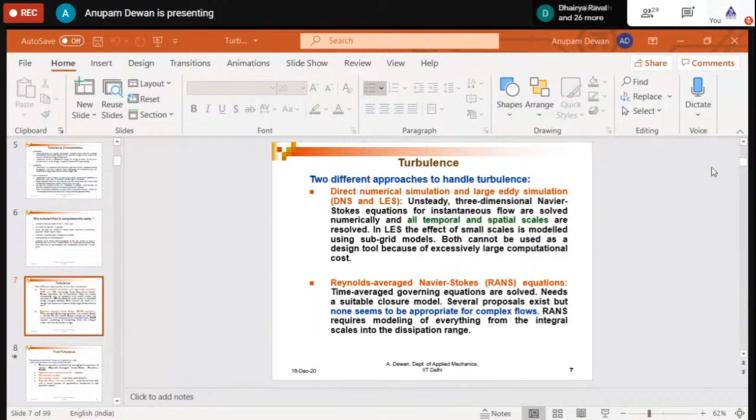So can you see the presentation? Yes, sir. Okay.

Turbulence modeling and overview of turbulence. So the title of my lecture as given in the pamphlet is Turbulence Modeling and Overview of Turbulence Models. The title is slightly different here, but nevertheless the contents are the same.

So can I ask one or two participants to tell me what do they know about turbulence? What is turbulence? So are the participants allowed to speak now? Yes, sir, they are allowed to. So I basically prefer to have a dialogue. I want to interact and then teach, or teach and interact, both ways. So can anyone tell me what do we know about turbulence?

So any answer? Irregular motion of the air. Fine, that's one small right answer, but a very small component. Anything else?

Okay, so I will start now. First, for 8 to 10 minutes I will talk about the physics of turbulence so that we can understand it. Once we appreciate how complex it is, I will talk about how to tackle turbulence. That was the title of my book, and currently I continue to work in this area.

So, definition of turbulence. I hope you can see the slide. Please tell me if you are not able to see it. You can see the slide.

A fluid motion in which velocity, pressure and other flow quantities fluctuate in time and space. So it's not just the velocity, but all flow quantities fluctuate in time and space. When we say that they fluctuate in time and space, it will become amply clear.

For example, you see this figure, can you see it clearly? Yes, sir. So initially, for once or twice, I will ask, and then if everything is clear, or if something is not clear, please point it out to me quickly.

So if you see here, what we see on the y-axis is u, that means the velocity in the x direction. Suppose you are sitting in a room and you have a coordinate system, and at a particular fixed point in the room, you want to see how the u velocity varies with time. So what you will do is use an instrument to measure it, and you will get a signal like what you see here.

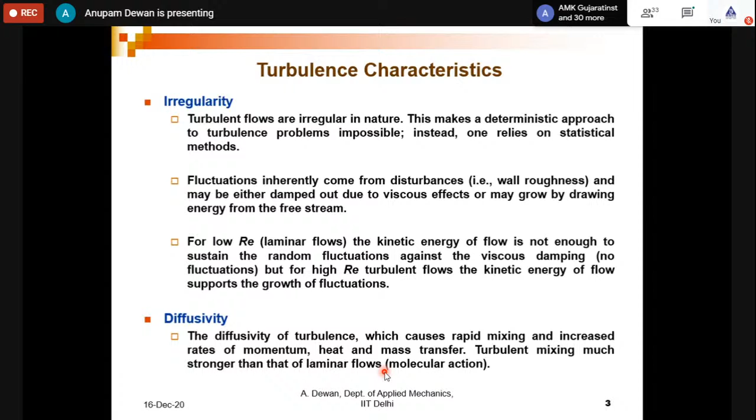So one key characteristic is irregularity, another is diffusivity. Another turbulent characteristic is that it occurs at a large value of the governing parameter. As mechanical engineers, most of us are familiar with the Reynolds number, which is the ratio of inertia forces to viscous forces.

But suppose it is some other flow, like a buoyancy driven flow - for example, smoke coming out of a chimney or from an incense stick, agarbatti smoke. Then in that case, the governing parameter is not the Reynolds number, but the Grashof number. So turbulent flow always occurs at high values of the governing parameter - Re in most cases, but not in all cases.

And how does it happen? Turbulence originates as an instability of laminar flows if Re becomes too large, or if the governing parameter becomes too large. These instabilities are related to the very complex interaction of viscous terms and nonlinear terms in the momentum equation.

Okay, just one question before I go to the next point. Can someone tell me what is vorticity?

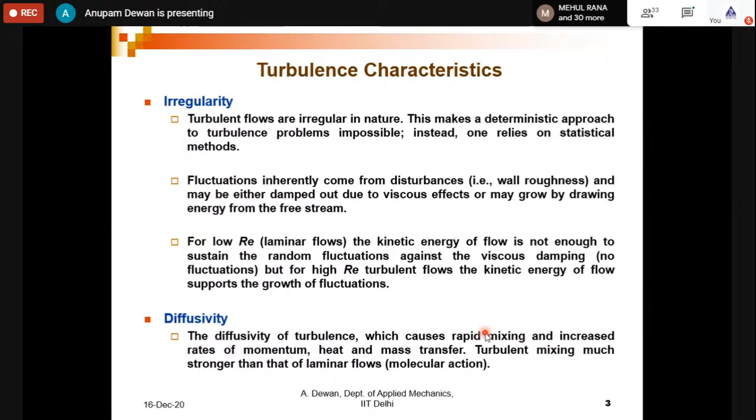Turbulent flow has irregularities and large diffusivity, which is very relevant. It occurs at large values of the governing parameter, and turbulent flows have 3D vorticity fluctuations.

So what is dissipation? Dissipation is loss of energy. Turbulent flows are always dissipative, meaning they lose energy. If there is a loss of energy, we need to compensate for it, otherwise turbulent flows cannot be sustained. So turbulence needs a continuous supply of energy to make up for these viscous losses. If no energy is supplied, turbulence decays rapidly. But we have seen that once a flow goes into a turbulent state, it does not decay because it takes energy from the mean flow.

Turbulence is also a continuum phenomena. Though there is a wide range of eddies at smaller scales, the smallest eddies are still much larger than molecular dimensions, and therefore it's a continuum phenomena, governed by the equations of fluid mechanics, as the smallest scales occurring in a turbulent flow are ordinarily far larger than any molecular length scale.

The last point is very important: turbulence is not a feature of fluids but of flows. For example, suppose we take one particular fluid, air, but in different situations, such as air in a wind turbine, air past an aircraft wing, or air in atmospheric boundary layers. It is the same fluid, air, but in different flow situations, the characteristics of turbulent flow will be different, because turbulence is not a feature of a particular fluid but of flows.

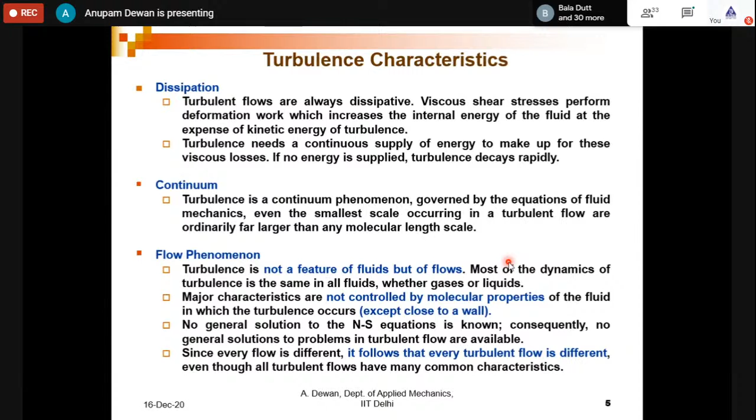In this course on applied computational fluid dynamics, when we do CFD, modeling of turbulent flows is a very important task. If we recall these characteristics, modeling turbulent flows is a very challenging task because the turbulent flow physics is very complex, as we have just seen.

So why is turbulent flow computationally costly? Don't go by the exact numbers, just get the impression. Suppose you take a flow on a plate of size 1.2 meters by 2.4 meters. We've seen that turbulent flow is always three-dimensional, so even on this flat plate, the flow will actually be three-dimensional. If you take the smallest eddy size as 0.04 mm, then in this domain you would need 5 trillion mesh points to resolve turbulence.

This was, of course, from 1970 - quite old. Now we have much faster computers, 50 years later. At that time, they said it would require 320,000 years with the computers available in 1970 to solve this for the given Reynolds number.

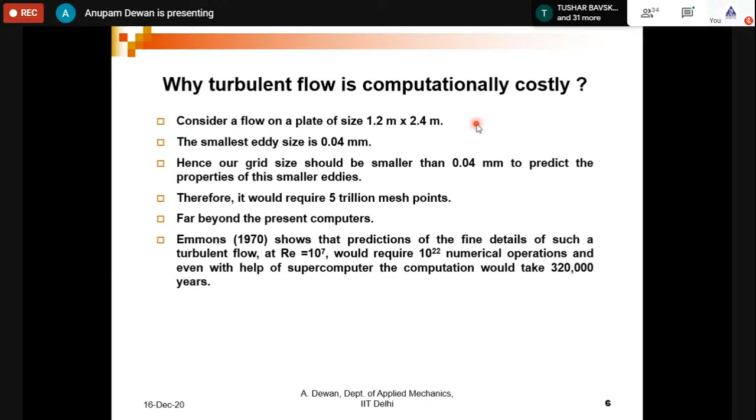Nowadays, if you want to perform such kind of computation, I think in IIT Delhi we have one of the very good high performance computing facilities. And if we want to do such a study in India on some supercomputer, such computation for this Reynolds number will take about 6 months to 1 year for a turbulent flow. So it's very important to understand turbulent flow and see if we can get the characteristics of turbulent flows without having to spend 1 year on a supercomputer. This is what we are going to try to touch upon in this lecture.

In the first category, unsteady three-dimensional Navier-Stokes equations for the instantaneous flow are solved numerically, and all scales in time and space are resolved, both temporal and spatial scales.

This is DNS. LES is slightly less computationally expensive compared to DNS, but in the same category. In LES, the effect of small scales is modeled using subgrid models. So in LES also we solve unsteady three-dimensional equations, but we do not go up to the smaller scales; rather, we model their effects. We write some equations to model the effect of the small scales. But both are actually quite computationally expensive.

So both DNS and LES are computationally very expensive. We are not working on DNS, but we are working on LES. And both DNS and LES, because they are very computationally expensive, cannot be used as a design tool due to the large computational cost.

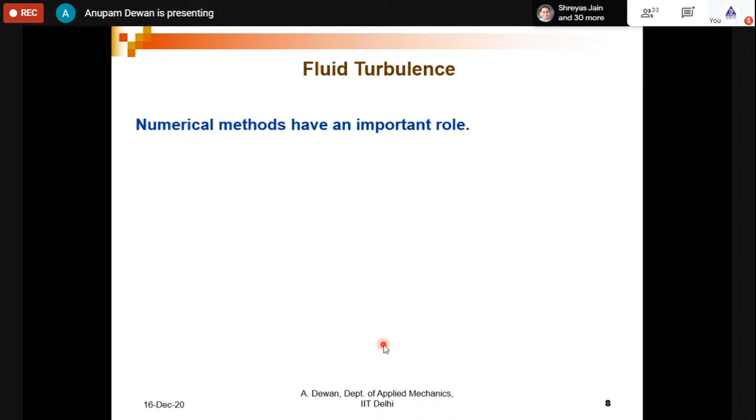So numerical methods have an important role. If you recall, in the previous slide we have seen DNS and LES, and I'm going to talk about everything. In IIT Delhi, we offer a full course on turbulence and its modeling, which runs through 42 classes, 14 weeks, 3 classes per week. It's a very challenging task for me to present an overview of all these approaches in just 1 hour and 15 minutes or so.

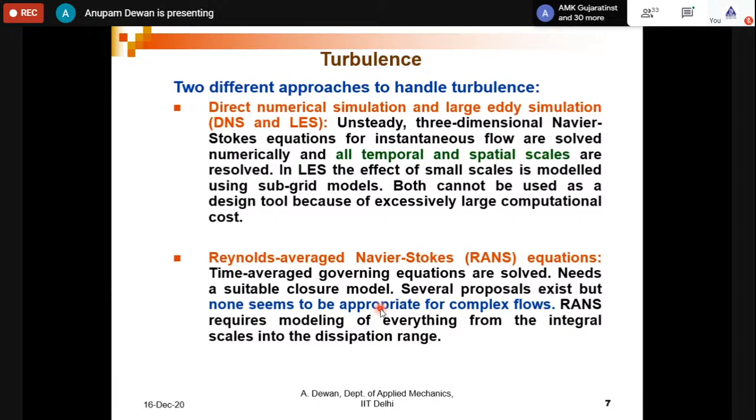In the Reynolds Averaged Navier-Stokes equation approach, the types of models are: algebraic model, 1 equation model, 2 equation model, and Reynolds stress transport model. We have already seen in large eddy simulation that we solve 3D unsteady Navier-Stokes equations and model the effect of the small scales. In direct numerical simulation, unsteady 3-dimensional Navier-Stokes equations are solved for all scales in turbulent flows.

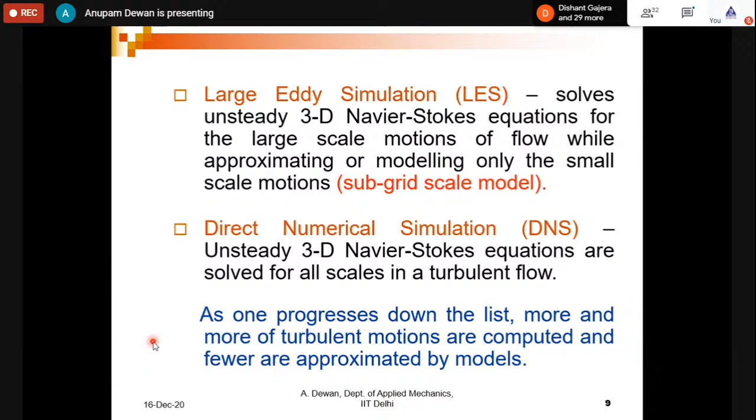So as you go from the first slide down the list, moving the pointer downward, we model fewer and fewer scales, and we actually resolve more and more scales. As one progresses down the list, more and more of the turbulent scales are computed and fewer are approximated by models. Any questions so far?

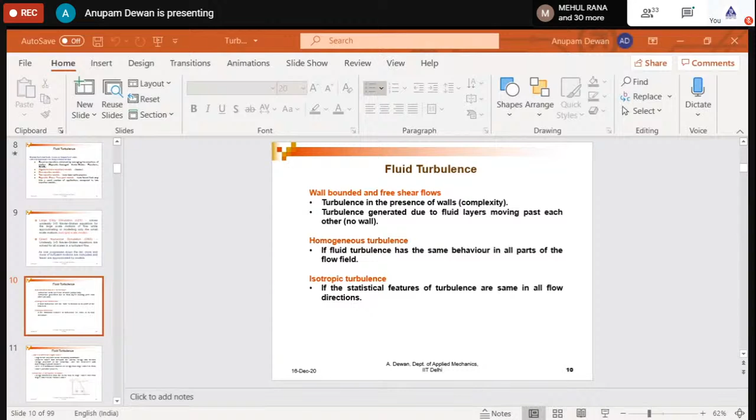So just some more characteristics: wall-bounded and free shear flow—turbulence in the presence of a wall, and turbulence with no wall is free shear flow. Homogeneous turbulence means the turbulence has the same behavior in all parts of the flow field, that is, at all points it is the same. Isotropic refers mainly to direction—if it is the same in all directions.

We have seen very important characteristics: eddies of different length scales, and largest eddies. This is very important. We have continuous change of size of the eddies from the largest to the smallest, and the smallest eddies are actually at the viscous level. The largest eddy size depends on the boundary conditions. For example, if you are sitting in a room, the largest size of the eddy will be as large as the dimensions of the room, and the smallest size will be at the molecular level.

Suppose you go to the atmospheric boundary layer, then the largest eddy size will be several kilometers, the size of the atmospheric boundary layer. So the largest size depends on the boundary conditions, and the smallest eddies that dissipate the kinetic energy into thermal energy depend on the viscosity.

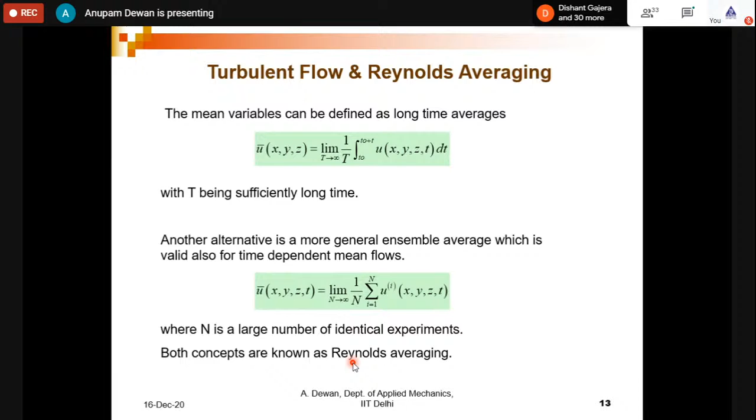This is a very important slide. We are all familiar with the Navier-Stokes equation for the instantaneous flow. All of us have done this in our bachelor's course, and most of the participants here are master's or PhD students, so we have also done this at the PG level course.

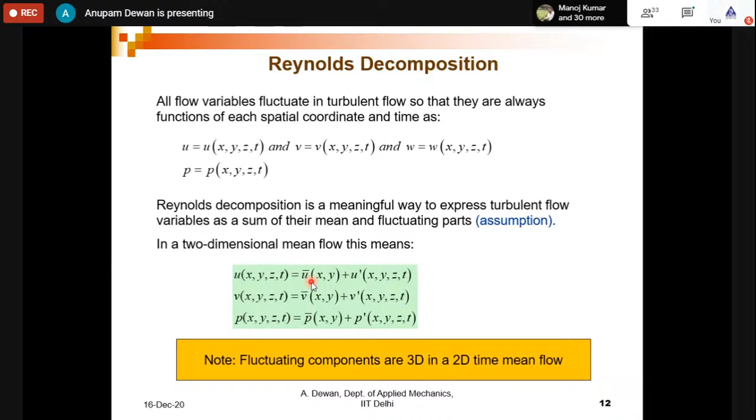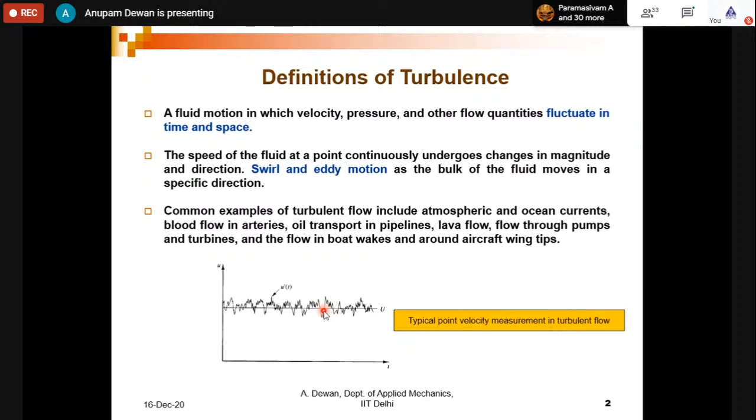Do this and substitute all these variables in the governing Navier-Stokes equation and perform the time average. We find that the time average equation, the continuity equation for the time average flow, is the same as that for the instantaneous flow.

Can you see my pointer? Yes sir. However, if we talk about the U momentum equation, V momentum equation, and W momentum equation, then

we find that each of these three equations has three additional terms which do not appear in the instantaneous flow. These are fluctuating terms that were not present in the instantaneous flow. Please see this carefully. And the last equation is the equation for any variable phi.

Phi can be temperature or concentration. So if we talk about isothermal flow, then we will not have this last equation, we will have only these three momentum equations.

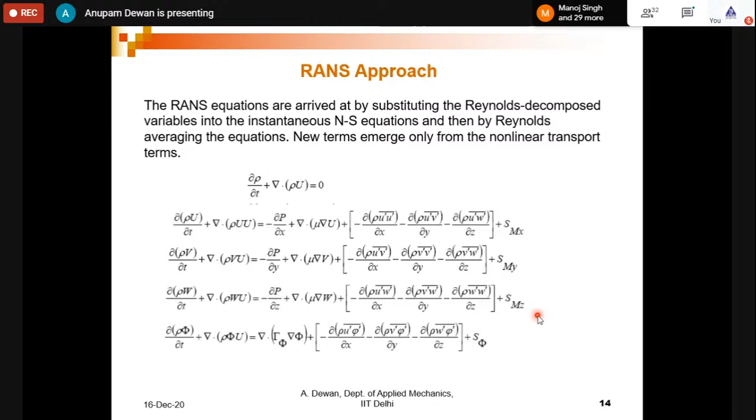This leads to the closure problem, because instantaneous continuity and Navier-Stokes equation form a closed set of 4 equations with 4 unknowns if we talk about 3D unsteady flow. But the time average equations have these 4 unknowns, plus 6 additional unknowns: rho U prime, rho V prime, rho W prime, and these.

These are called normal stresses and shear stresses, and we are presently not talking about the last thing because we are considering isothermal flow. So the number of unknowns is more than the number of equations, and it is a closure problem if we are talking about the time average flow.

And likewise, in the previous case it was 3-dimensional flow. You can also write for 2D flow. In 2D flow we are very familiar with this equation. We have actually total 3 additional terms: there are 2 in this, 2 in this, but out of these 2, U prime V prime is common. So additionally we have 3 terms.

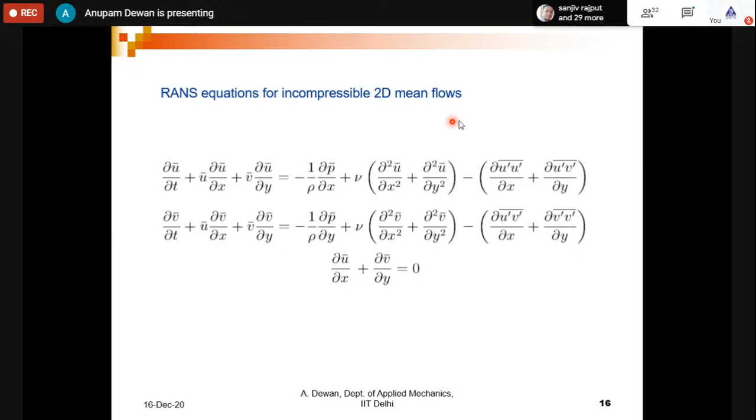So now we have to actually minimize these terms. If we recall, for laminar flow, the shear stress term is taken as mu into rate of strain.

So what we do is, like the laminar flow, we actually try to reduce the number of unknowns, and these unknown terms are called Reynolds stresses—Reynolds normal stresses, Reynolds shear stresses. So we want to minimize them using the Boussinesq approximation.

By the Boussinesq approximation, the Reynolds stress term, these 6 terms written in the form of a tensor tau ij, is written as mean rate of deformation and the eddy viscosity. Eddy viscosity is different from the molecular viscosity, because eddy viscosity is actually a flow property, not a fluid property, as we have seen.

And we can also write this for u prime phi prime—that means if it is a thermal energy equation, then we can write this. So this is the Boussinesq approximation.

So in order to reduce the number of unknowns, which was large, first we use the Boussinesq approximation. But when we use it, we get this eddy viscosity, which is a flow property—it is not a fluid property, so it will not depend on what fluid is being taken, but it will depend on what flow configuration is being considered.

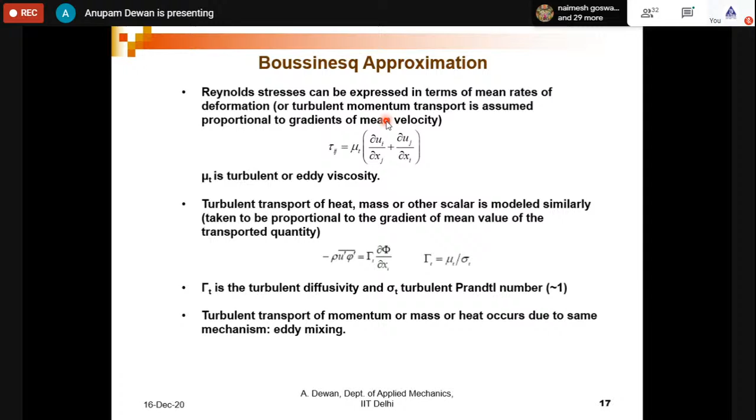So now the idea is, how do we calculate mu t? Because once we know mu t, we can find out the Reynolds stress, since the mean strain rate is anyway being calculated. So there are a range of models. If you recall, I told you about the 0 equation model, 1 equation model, 2 equation model.

So actually, when we say 1 equation model, 2 equation model, please note very carefully that the word which is missing is the transport equation. When we say 1 equation model, it means we are using one more. What is a transport equation? It is like the momentum equation.

A typical transport equation has, if you take the x component of the Navier-Stokes equation: the unsteady term, convection term, diffusion term on the right hand side, viscous diffusion term, and the source term. So when we say 1 equation model, that means we are writing one additional transport equation. When we say 2 equation model, we are writing 2 additional transport equations.

When we say zero equation model, it means we are calculating the eddy viscosity without writing any transport equation. But it does not mean we are not using any other equation. We might be using an algebraic equation. An algebraic equation is not a transport equation. A plus B equals C is not a transport equation. So this should be very clear.

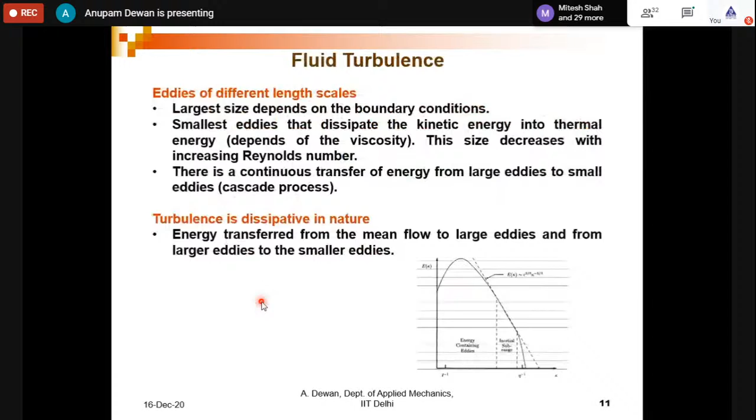The last approach is the Reynolds stress transport model. In this model, we do not use the Boussinesq approximation. I will give you a glimpse of that. Rather, for each of these unknowns, six unknowns here for example, we derive the transport equation.

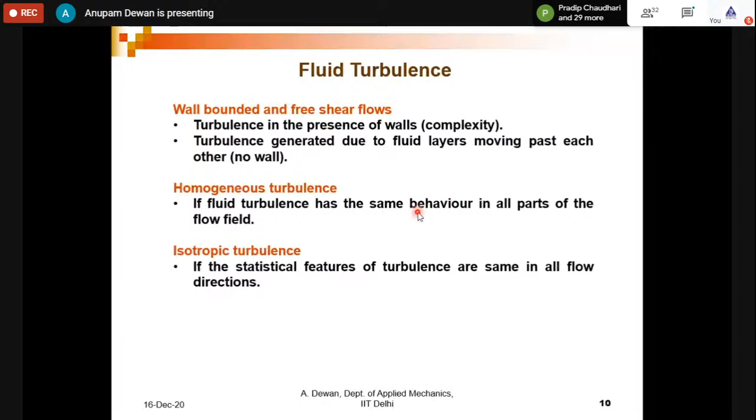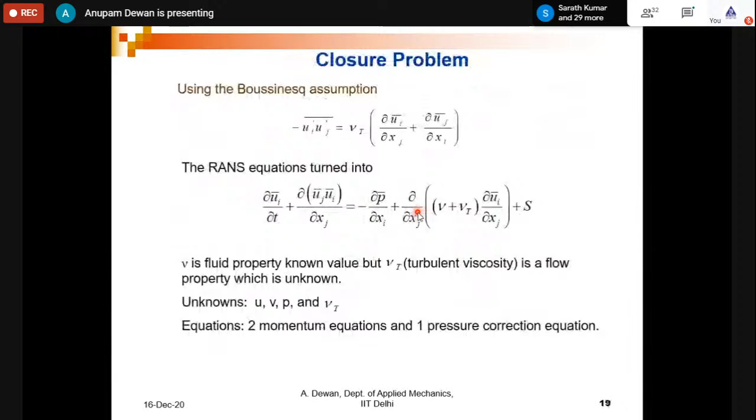So what was the first model? The first model that we saw was the zero equation model. It is also called the algebraic model because here we use an algebraic equation. The zero equation model is also called the mixing length model, where nu t, the eddy viscosity, is calculated by some algebraic relations. We will not go into the details of the zero equation model because it was being used 40-50 years ago. The mixing length model is not used nowadays, so we should just skip this.

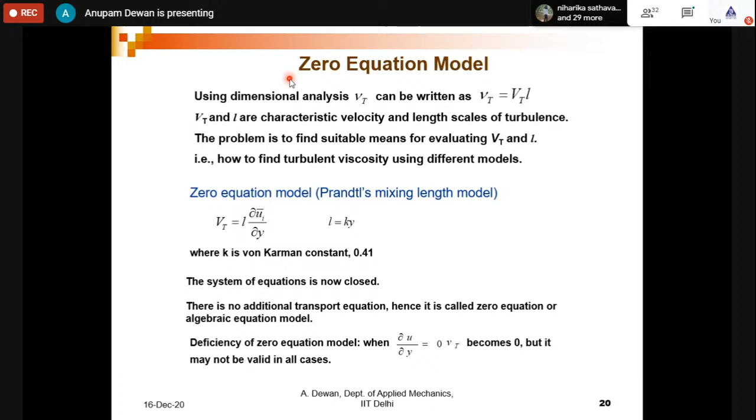The next is the one equation model. It is also not used nowadays, and we will see why. But in the one equation model, we use one transport equation to calculate the value of eddy viscosity. Generally, it is the equation written for K, turbulence kinetic energy. Turbulence kinetic energy represents fluctuations in turbulence: U prime square, V prime square, W prime square. We can derive a transport equation for K, and based on this, we calculate the eddy viscosity as L square root of K, where L is some length scale which is still unknown.

So both the zero equation model and one equation model that we have seen briefly are incomplete models of turbulence, because these models need specification of the geometry being considered. That means they depend on the geometry. If you apply the one equation model for flow through a pipe, it will need some specification. If you go to some other geometry, it will need some other specification, so it's a problematic situation.

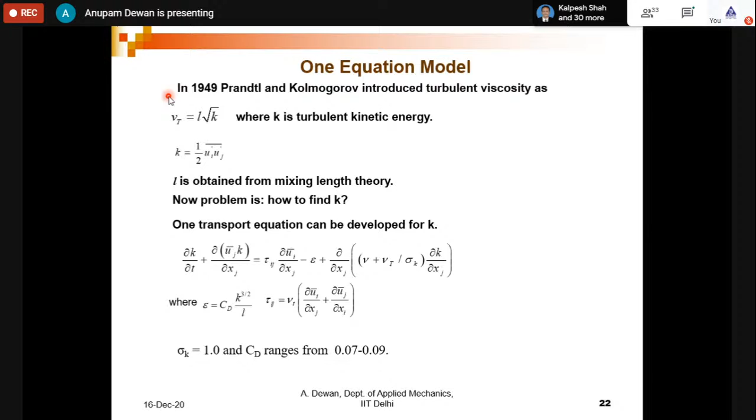So we go to the next level of turbulence model, the two equation model. Turbulence is characterized by a length scale and a velocity scale, so we must use at least two transport equations so as to have no need for any specification. Any model which uses two equations or more will be a complete model.

The simplest two equation model is the K-epsilon model. Most of us are familiar with this. As the name implies, we write one equation for K, the turbulence kinetic energy, and another for epsilon, the dissipation of turbulence kinetic energy, where dissipation is always loss of energy. The K-epsilon model is very widely used, and it is the simplest complete model of turbulence. That means it does not need any specification. It's a two equation model.

It is a high Reynolds number model. Again, in the turbulence community, we don't use the word turbulence loosely—it is for high turbulence Reynolds number. For example, if you apply turbulent flow through a pipe, what will be the level of turbulence at the wall of the pipe? At the wall, the no slip condition will be applied, and there will be no turbulence because of that. So if you come from the center of the pipe to the wall, the turbulence will die down and become zero at the wall, and in such a case, this model cannot be applied.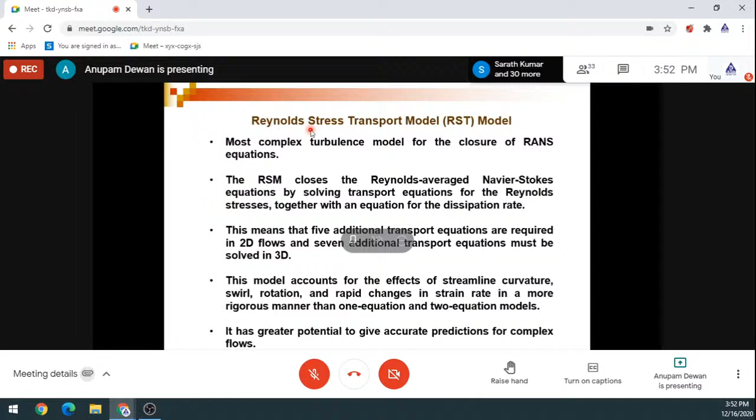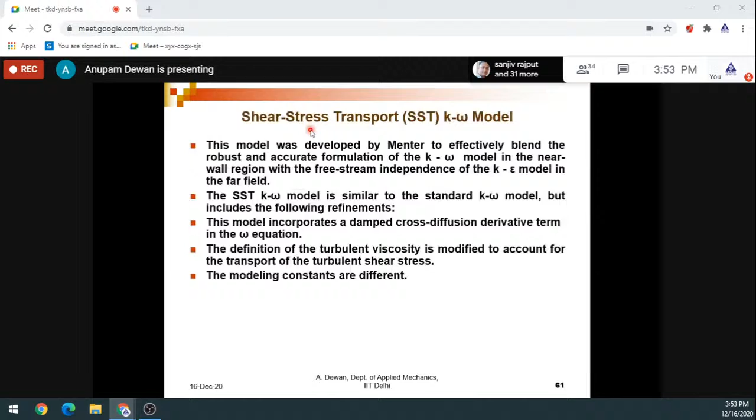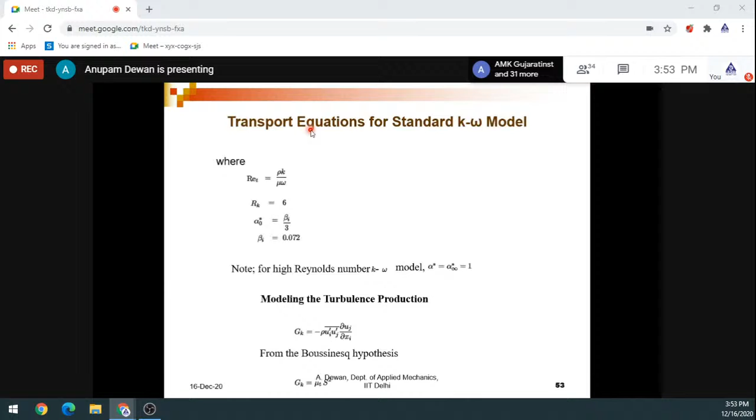Slightly different. So far in all the models we have seen, we actually use the Boussinesq approximation. This means the Reynolds stress was taken equal to eddy viscosity times the mean strain rate, and all these previous models were used to calculate the eddy viscosity. But if we do not use the eddy viscosity, if we do not use the Boussinesq approximation, then we have to derive transport equations for these unknowns, six unknowns. So in the Reynolds stress transport model, we do not use the Boussinesq approximation; rather we derive transport equations for these six Reynolds stresses.

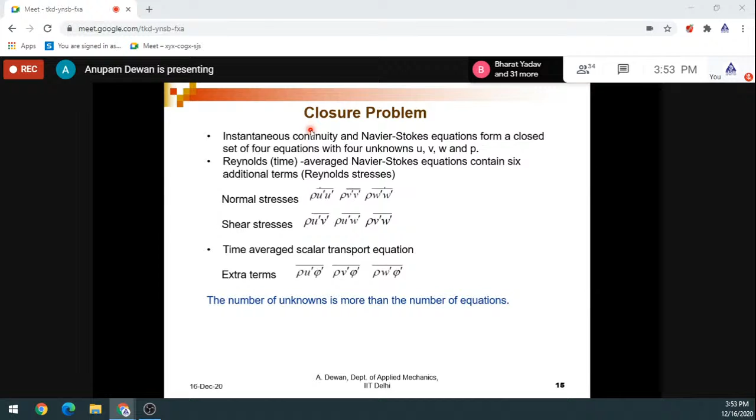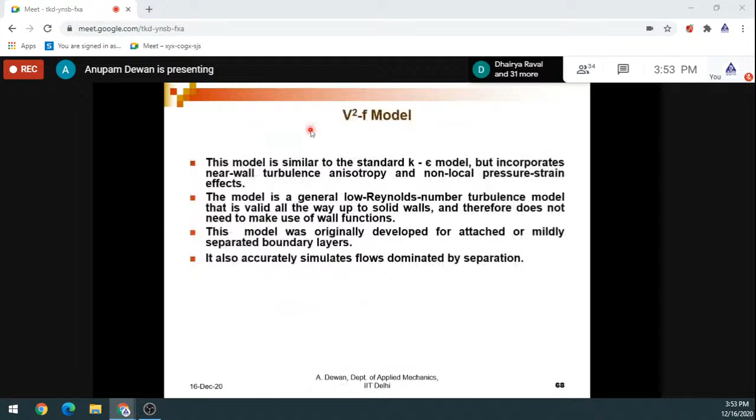So there are many unknown terms, and if we want to write a transport equation, we do not know anything about these terms: turbulent diffusion, buoyancy production, stress production, molecular diffusion, pressure strain, dissipation, and production by system rotation. Therefore it becomes difficult to model these terms.

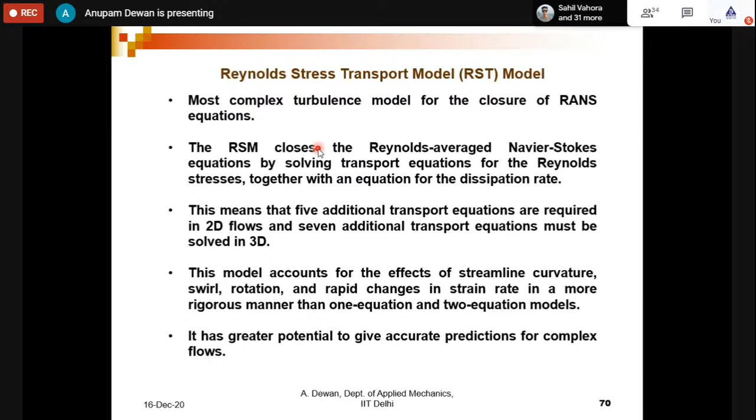So the Reynolds stress transport model is the most complex turbulence model for the closure of the Reynolds Averaged Navier-Stokes equations. In this model, we solve transport equations for the Reynolds stresses, and all these six Reynolds stresses will also have a dissipation. So suppose you have six Reynolds stresses, you will have six dissipations, but we actually write one equation for dissipation. Therefore we write seven equations for 3-dimensional flow, and five equations for 2D flow, so many equations with so many terms, which becomes difficult. Therefore Reynolds stress transport models are not so widely used because of the difficulty in modeling these terms.

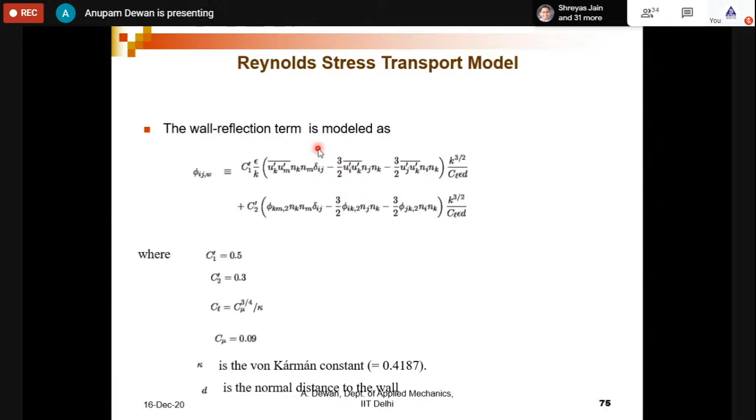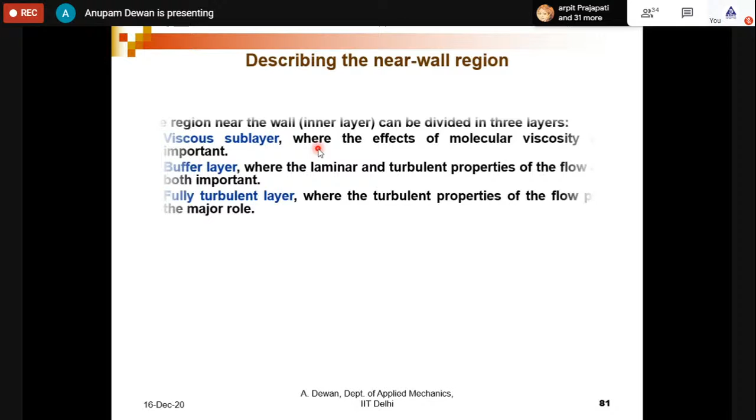This brings us to the end of Reynolds stress models. I will just briefly touch upon turbulence in the presence of a wall. We know that if you have turbulence in the presence of a wall, there are three layers: viscous sublayer, buffer layer, and fully turbulent layer. Most of these models, not all, but most, cannot be applied right in the vicinity of the wall.

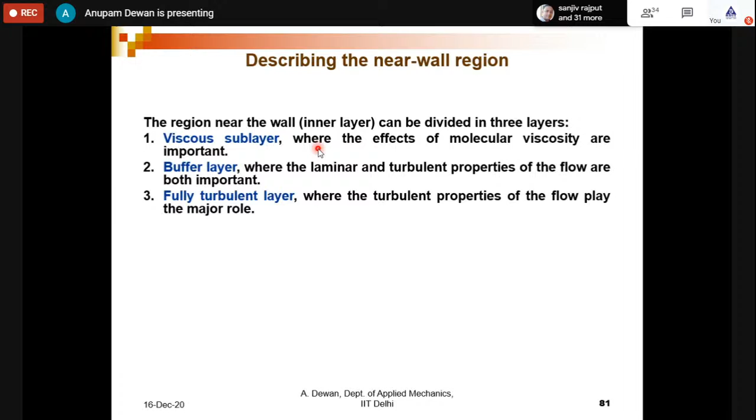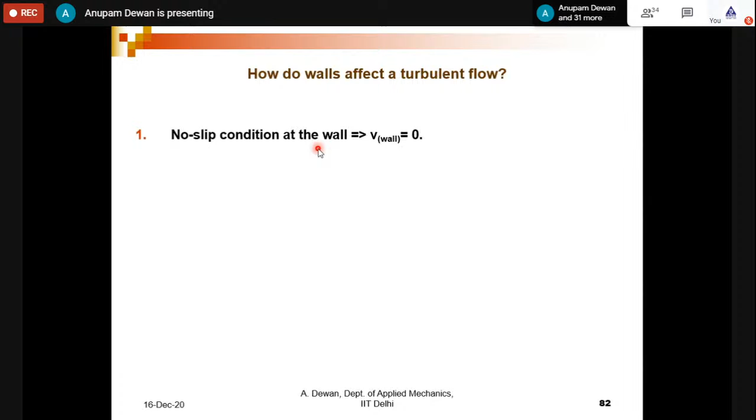So how does the wall affect a turbulent flow? One is the no-slip condition, because of which there is no turbulence right at the wall. Then there is viscous damping, as viscous effects become important close to the wall. There is also kinematic blocking near the wall, and there are very large gradients in temperature and velocity field. Therefore these models need to be adjusted close to the wall.

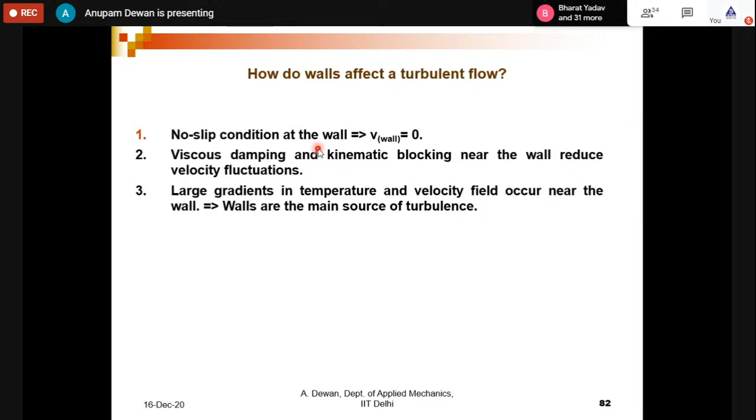There are different approaches, and I will not go into the details. One is the wall function approach, where we do not go right up to the wall; instead we take the first grid point slightly away from the wall and specify velocity values there. The other is the low Reynolds number approach, where we go right up to the wall, but we actually need a very fine mesh close to the wall. So there are different ways of handling turbulence in the presence of a wall.

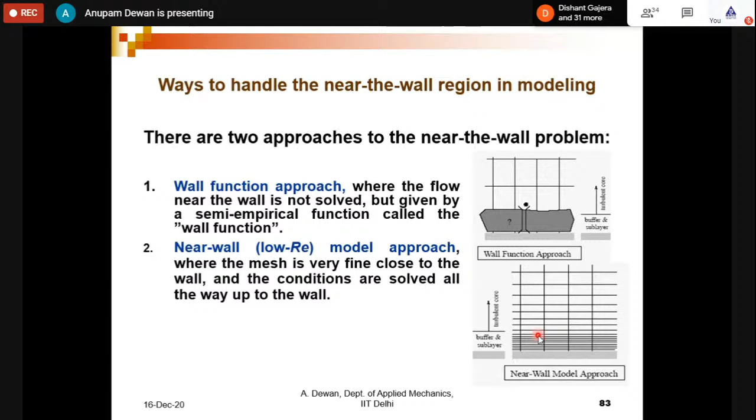I think I will skip this and go directly to LES and DNS.

So what is DNS? In DNS, as we have seen, when I gave you the example earlier of some flat plate and those dimensions, in DNS we have also seen earlier, we do not do any modeling.

If we do not do any modeling, that means we resolve all the scales. In other words, if we resolve all the scales, we also have to resolve the smaller scales. But the smaller scales are actually very small, and therefore it requires very large computational resources.

So DNS requires no modeling, but it demands resolution from large scales all the way through the beginning of the dissipation scales. So there are a range of scales. The smallest scales are called dissipation scales. These are very small. This is the most accurate approach to turbulent flow simulation.

We solve the Navier-Stokes equation for instantaneous flow without averaging or approximation. If we solve them numerically, there are numerical discretization errors, but using CFD techniques, you are doing a course on CFD, we can actually minimize these errors.

And the cost of simulation in this case goes as Re to the power 3. This is very important. So suppose you take Reynolds number at 10,000, you have some computational requirement, and you increase the Reynolds number by a factor of 10. From 10,000, flow through a pipe, Reynolds number 10,000, then you go to Reynolds number 1 lakh. So factor of 10, but your computational requirement will go as 10 raised to power 3, 1,000 times.

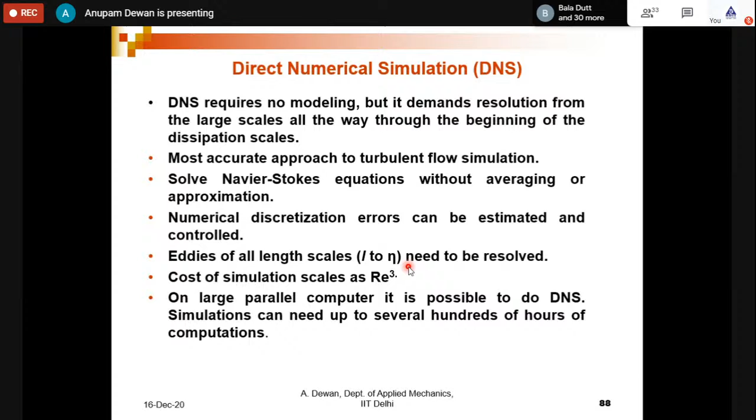Since computational power goes as Re to the power 3, DNS is limited to small Reynolds numbers, and it contains so much data that it actually becomes difficult to manage, and sometimes it is not very useful from an engineering point of view.

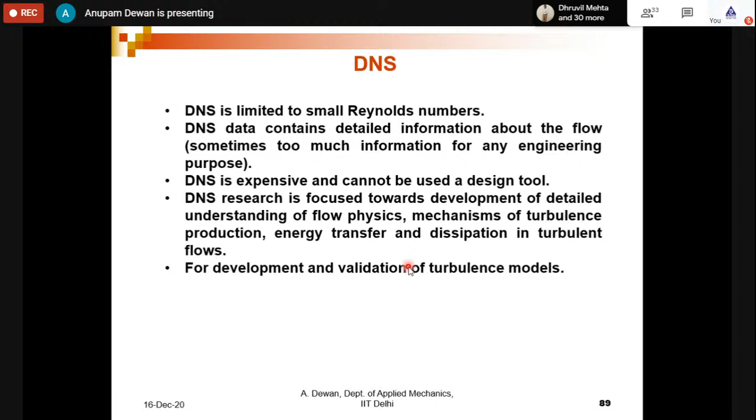Then large eddy simulation, which is similar to DNS, but in LES actually we do not resolve the smallest scales. If we do not resolve the smallest scales, then our mesh requirement can be reduced.

But smaller scales are important, so if you do not resolve them, you have to write some equations to take care of the effects of the small scales. So LES requires modeling of part of the inertial subrange and into the beginning of the dissipation scales, but we do not go right up to the smallest scales.

And we use a cutoff length, such that beyond some length we are not going to resolve, but we need some models. So LES resolves the large flow structures by selecting an appropriate filter function.

For example, if you see this range of scales, in DNS we go right up to this point, whereas in LES, smaller scales. As you go in this direction, the scales become smaller and smaller because it is actually the reverse of wave number. Wave number k is the inverse of the length scale, so if we go to a higher value of k, it is actually a smaller and smaller scale.

In LES, small scales are actually modeled, and we write some filtered form of the Navier-Stokes equation.

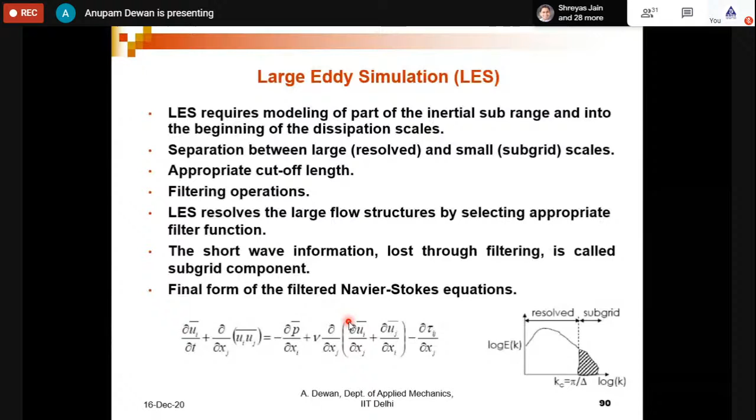Why do we do this? Or can we do this? This is because one key characteristic which I mentioned in the beginning was that there is a large range of scales, and the largest scales actually depend on the size of the boundary conditions.

In other words, if you take different flows - air in an air conditioning duct, air in an atmospheric boundary layer, air in a turbine - all these have different length scales, large scales, because the boundary conditions are different. But in all these different configurations for the same fluid, you will find that the smallest scales or smaller scales are somewhat similar.

So the turbulent scales are characterized by eddies with a wide range of length and time scales. The largest eddies are typically comparable in size to the characteristic length of the mean flow. The smallest scales are responsible for the dissipation of turbulence kinetic energy.

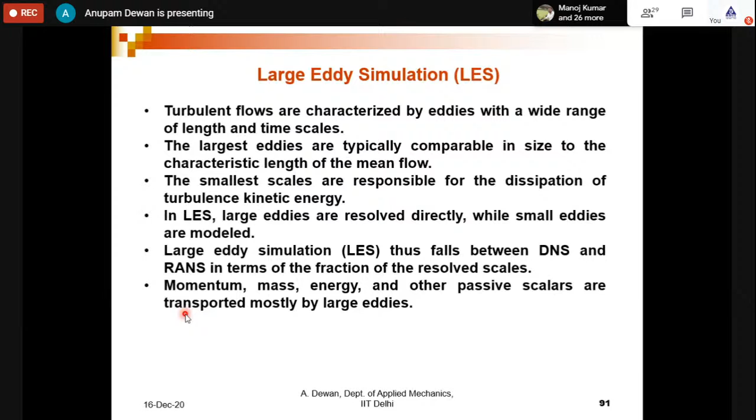In LES, large eddies are resolved directly while small eddies are modeled. If you have small eddies which are similar, then it is easy to write models, and most of the dynamics of the flow is governed by the large scales. And if you compute large scales, then momentum, mass, energy, and other passive scalars are transported mostly by large eddies, so it works.

Large eddies are more problem dependent. They are dictated by the geometries and boundary conditions of the flow involved. Small eddies are less dependent on geometry and tend to be isotropic and more universal. Therefore the chance of finding a universal turbulence model is much higher for small eddies.

Resolving only the large eddies and not the small eddies allows one to use a coarser mesh. Coarser mesh means bigger mesh, the smallest mesh size can be bigger. So we can use coarser mesh and larger time steps compared to DNS. In other words, LES has most of the important characteristics of DNS, but at a smaller computational cost.

But it does not mean that LES is comparable to RANS. It's still several orders of magnitude larger than RANS. LES still requires substantially finer meshes than those for RANS calculation, and it also has to be done for a sufficiently long time. The computational cost for LES is normally orders of magnitude higher than for RANS calculations, typically around 10 times. So if a RANS computation takes 2 days, LES may take 2 or 3 months, and DNS may take 1 year. So computational cost in LES is larger than RANS, but less than DNS.

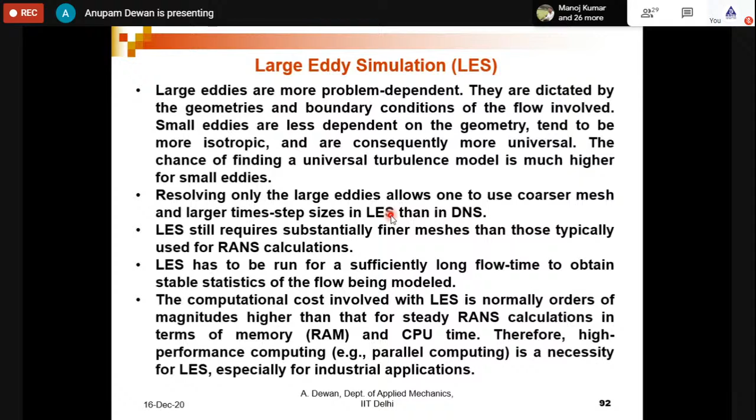Nowadays we are working very extensively on large eddy simulation. In fact, my research group is working on large eddy simulation in climate modeling, cloud, combustion, jet impingement heat transfer, flow past bluff bodies, and many other situations.

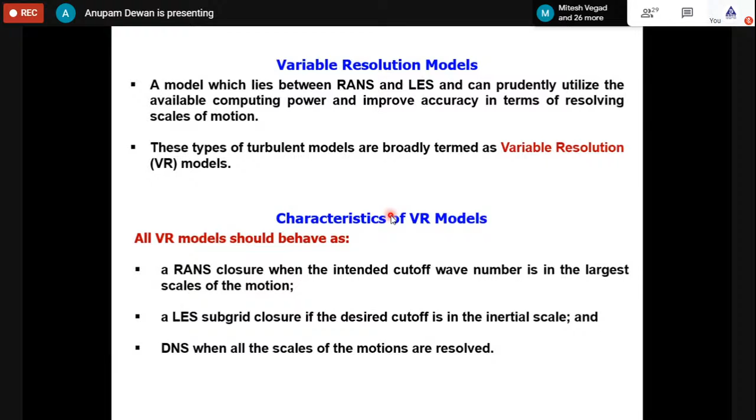Nowadays we are also very active in variable resolution models. For example, if you see this scale, this energy spectrum we have seen earlier: in RANS we actually model for all the scales, in DNS we resolve all the scales, and in LES we resolve part of the scales. Then there is a variable resolution modeling approach in which we can adjust between RANS and DNS.

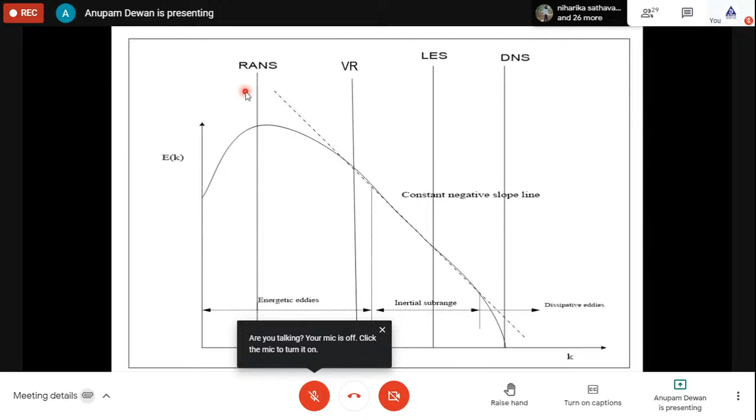There are two types of such approaches: hybrid modeling approach and grid bridging modeling. The PANS approach is very important, and our research group is very active in it. If you visit my webpage, you will find that we have a lot of major contributions in the PANS approach worldwide. PANS is actually the Partially Averaged Navier-Stokes approach, and in some sense it is similar to LES - we get the features of LES but at a lower computational cost. There are some points about PANS versus LES here.

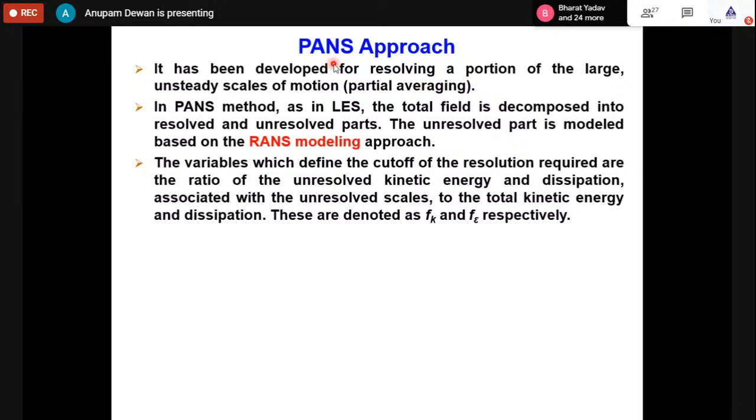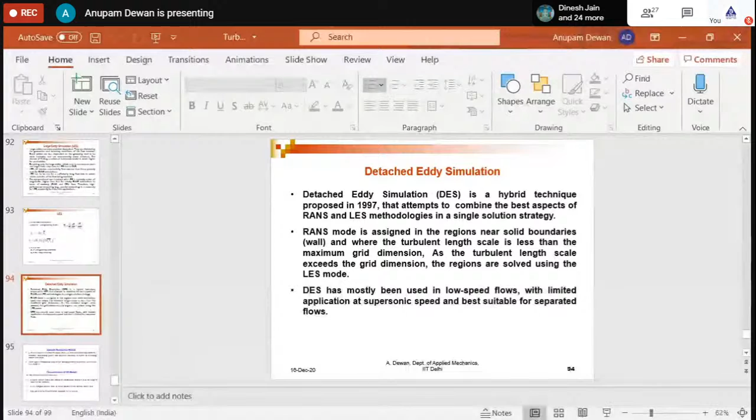I think I will stop here. I hope you are able to comprehend, understand, and get some additional knowledge, and I'll be glad to answer any questions or interact with you.